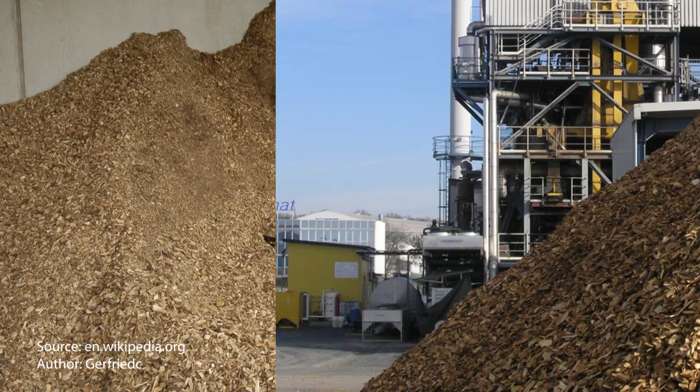Today, there are more than 272 gasification plants with more than 600 gasifiers operational worldwide, mainly focused on coal, oil and gas. For biomass, there are around 30 large-scale operational gasifiers. Gasification of biomass as a technology has received much attention despite still being in its infancy as a clean conversion technique providing chemicals and energy for humanity.

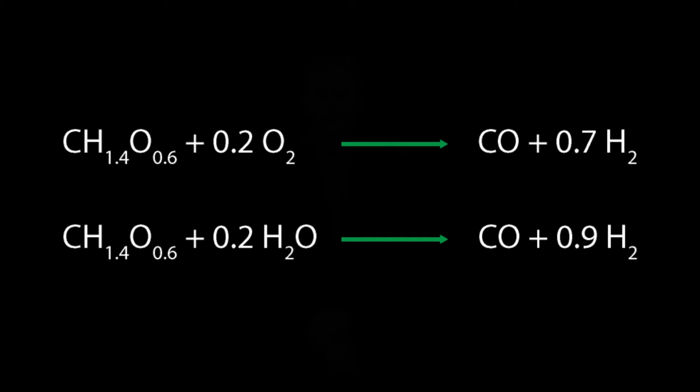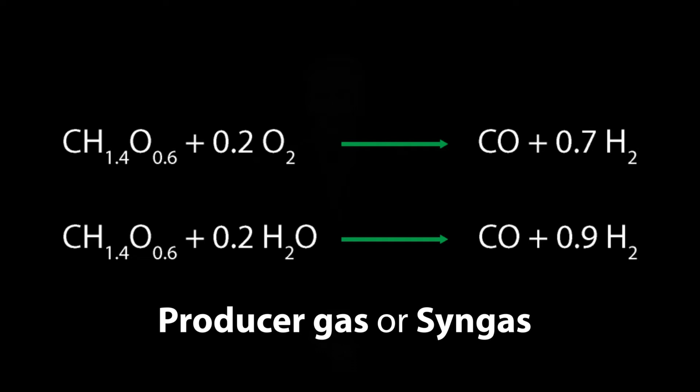Biomass gasification is the conversion of dry biomass primarily into CO and hydrogen, also called producer gas or syngas. This process can be performed via reaction with oxygen or an oxygen-delivering donor, such as steam, as shown in the reaction equations, which represent the chemical reactions during gasification of wood. Essential for gasification is the use of less oxygen than needed for complete combustion to CO2 and water.

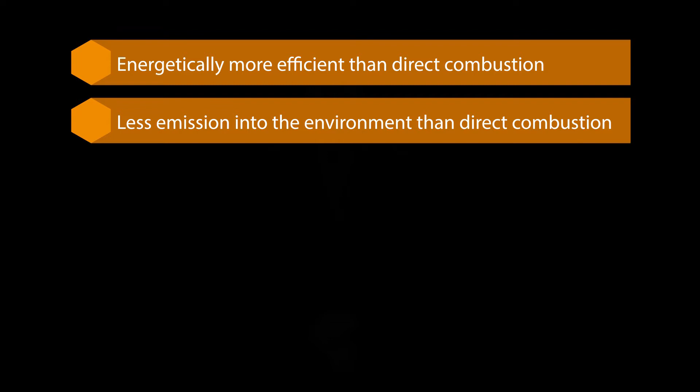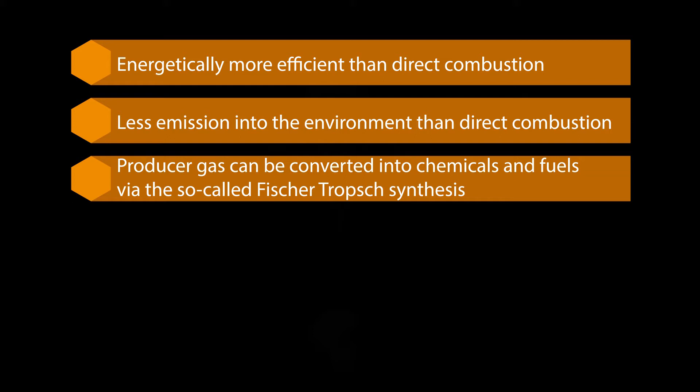Why gasification? Gasification is a clean, reliable and flexible way to create producer gas from low-value feedstocks for the production of high-value products and power. Gasification is energetically more efficient than the direct combustion of biomass, has fewer emissions into the environment than direct combustion, produces producer gas that can be converted into chemicals and fuels via the so-called Fischer-Tropsch synthesis, and is proven technology.

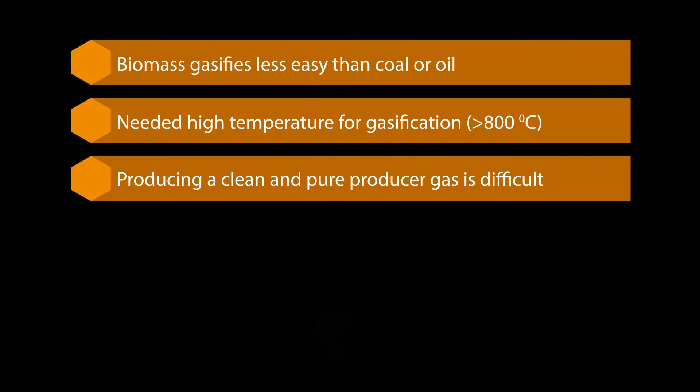The challenges of biomass gasification are as follows. Biomass gasifies less easily than coal or oil. The required high temperature for gasification, above 800 degrees centigrade, means the use of specific equipment and knowledge. Producing a clean and pure producer gas is difficult. The application of the producer gas is often limited by the presence of tar and/or dust.

Most biomass gasification systems use air instead of oxygen for the gasification reactions, which is typically used in large-scale industrial and power gasification plants. Gasifiers that use oxygen require an air separation unit to provide the gaseous or liquid oxygen. However, this is usually not cost-effective at the smaller scales used in biomass gasification plants.

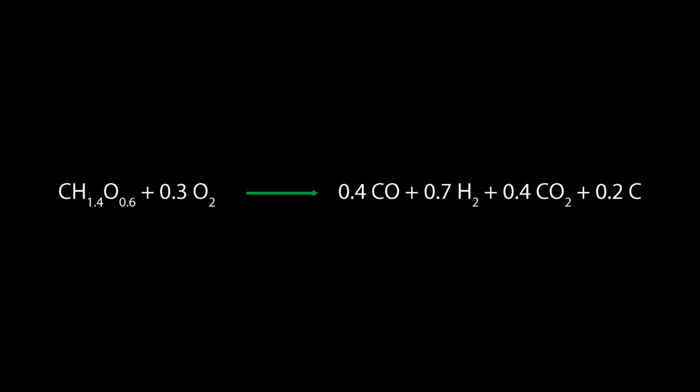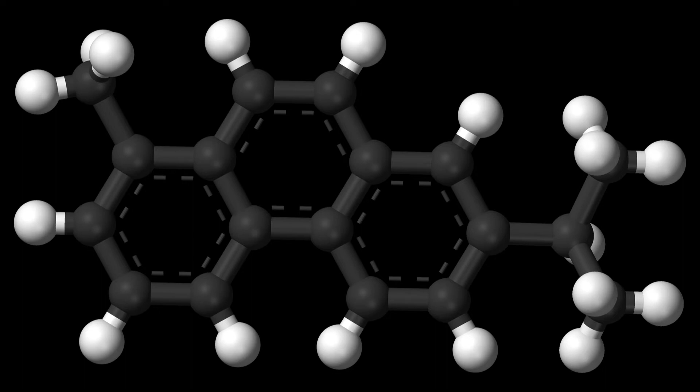This means that the biomass gasifiers are operated at a relatively low temperature, typically 850 degrees Celsius, resulting in incomplete gasification. Producer gas from gasifiers that operate at relatively low temperatures typically contain unreacted carbon in the form of tars. Tars comprise a wide spectrum of organic compounds, generally consisting of several aromatic rings. Tars tend to deposit, forming sticky deposits in locations that can significantly impair equipment performance and are difficult to remove.

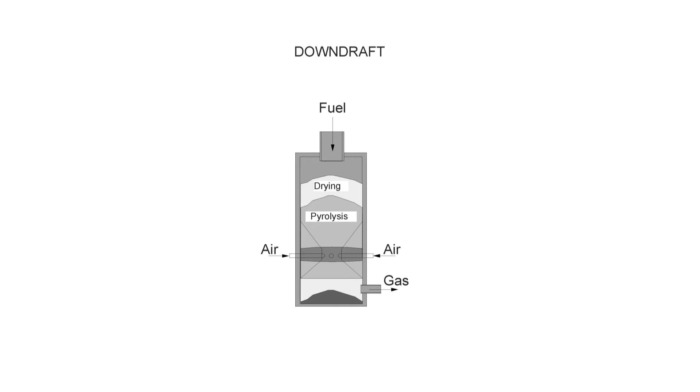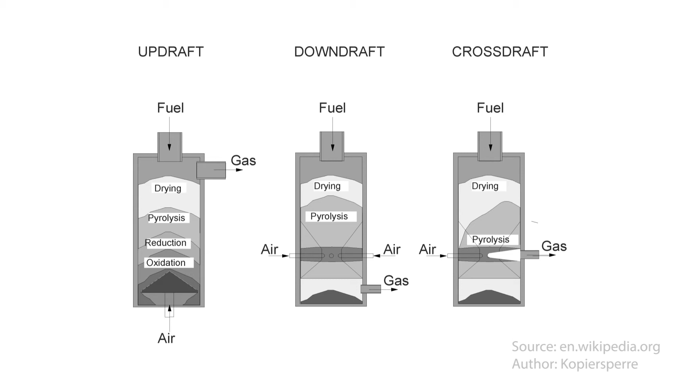Which reactor systems are used for biomass gasification? Typical reactor systems used for biomass gasification are fixed bed, fluidized bed, entrained flow and multi-stage. Firstly, fixed bed gasification. Fixed bed gasification can be divided into downdraft, updraft and crossdraft. Biomass is fed in on top, while the producer gas may leave the gasifier at the top, side or bottom of the fixed bed gasifier. Fixed bed biomass gasifiers are only used for smaller sizes, below for instance 5 megawatt thermal. Fixed bed gasification of wood is used in Harboøre in Denmark and Wiener Neustadt in Austria.

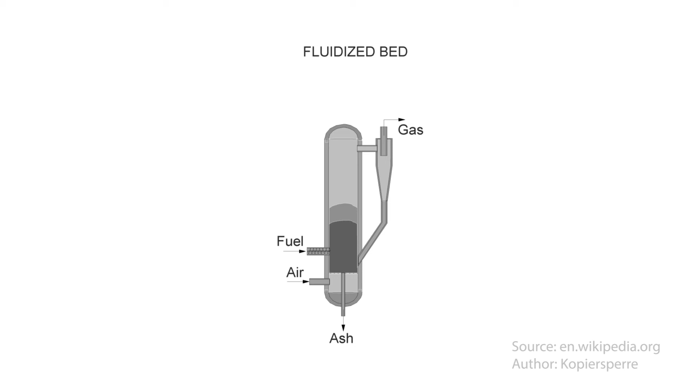Secondly, fluidized bed gasification. With this type of gasifier, air or steam is injected at the bottom of the gasification reactor. This upward air or steam movement results in the fluid-like behavior of the bed material and excellent heat transfer within the reactor. Fluidized bed gasifiers can be used for various capacities. Some European examples are Värnamo in Sweden, Arbre in North Yorkshire, UK, Skive in Denmark, and Amergas in Geertruidenberg in the Netherlands.

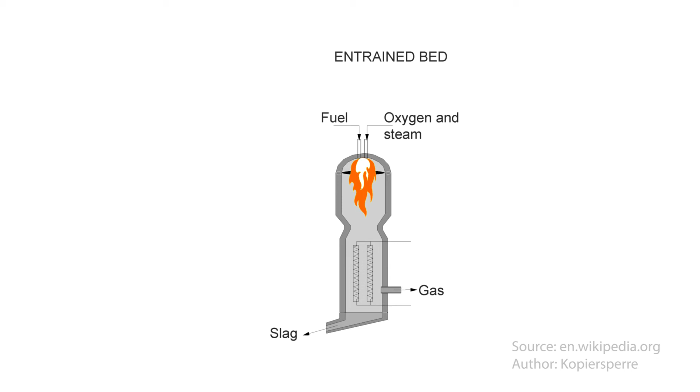Thirdly, entrained flow gasification. The biomass is often pulverized prior to gasification and, most often, a pressurized reactor is used with oxygen as a gasification agent. European large-scale entrained flow gasification examples have been developed in Buggenum, the Netherlands, and in Puertollano, Spain. These gasifiers were designed for coal and petroleum coke, but also admixed biomass to lower the CO2 emissions. However, the operation has been terminated from an economical point of view.

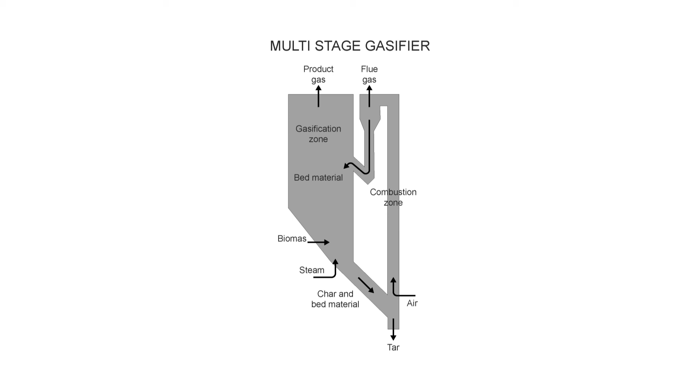Fourthly, multiple-stage gasification. The gasification process takes place with steam in a bubbling fluidized bed combined with a combustion section for the removal of the carbon deposited on the bed material and to supply the heat for the gasifier. This process produces a high heating value producer gas combined with a low tar content. A few European examples of indirect or steam gasification are the DTU Viking gasifier in Lyngby in Denmark, Güssing in Austria and Milena in the Netherlands.

The gasification processes of coal, oil and gas are well-established technologies working on a large scale, bigger than 80 megawatt thermal. Biomass gasification as a clean conversion technique providing chemicals and energy for humanity still needs development. It typically works on a smaller scale, smaller than 20 megawatt thermal and at lower temperatures. This lower temperature leads to the formation of tars in producer gas, making the reactor operation and cleaning of the gas more complicated. The removal of tars is essential for use of the producer gas in a gas turbine for power or Fischer-Tropsch synthesis for chemical production.